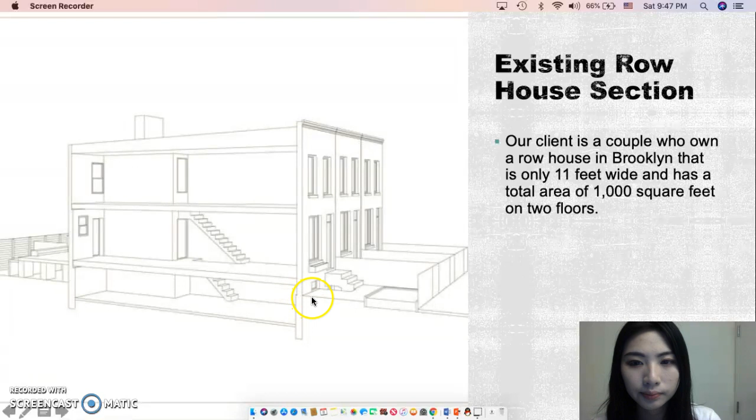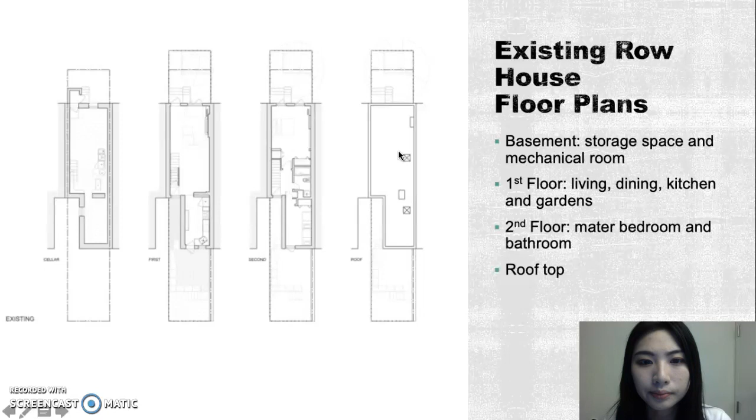Now let's talk about the project scope and objectives. After living in this building for 8 years, they decide to expand the original building to provide more living space for their 2 growing children. They want to stay in their familiar neighborhood, but explore more space for their children. After discussion, they decide to keep the original site and the basic structure for this house, but we will redesign everything for the house.

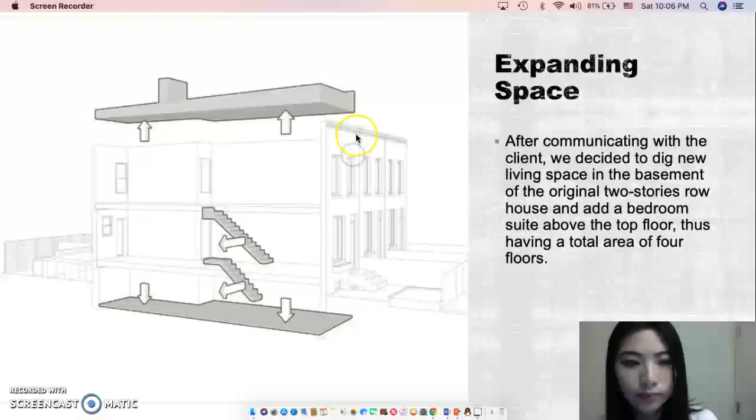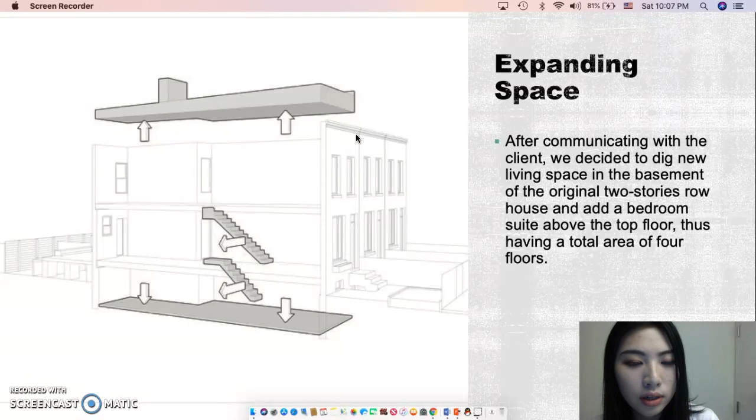Expanding space. To expand the space, our solution is digging the basement deeper and making it a whole floor, so we have more living space at the basement level. Then we remove the original rooftop and have a new rooftop, and we also add 1 more story at the top of the building. The last solution is changing the location of the stair. We move the stair, which was in the middle of the house, to the side of the house, so we can have a larger area for the function programs.

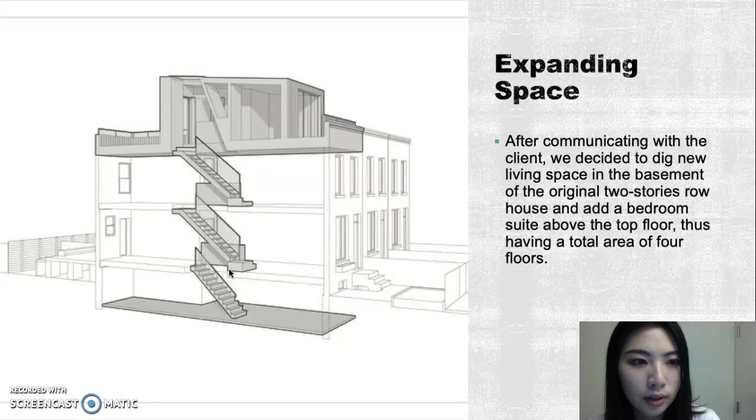Here is what we have after we change it. So we can see the location of the stair has changed, and we have a taller ceiling for the basement, and also at the top of the building we have a partly interior space and an exterior space.

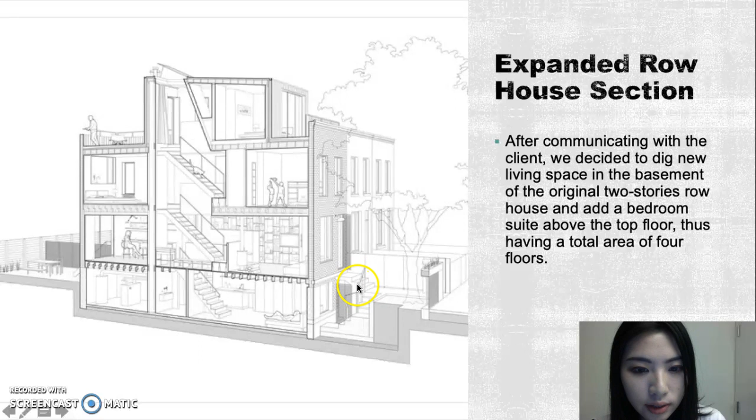Now this is the expanded row house section. On this section we can see our main entrance has changed, so we have two main entrances. One is from the basement, and another is the original one still on the first floor. For the basement, we have the living room, the laundry, and the mechanical space. And for the first floor, the main function is the living area, so we have living, dining, reading, and kitchen.

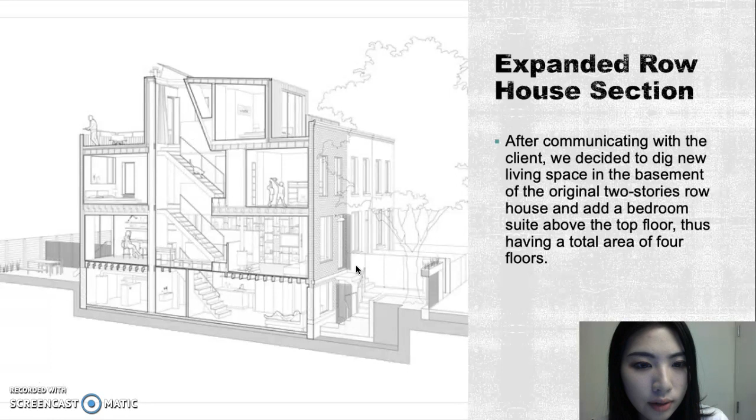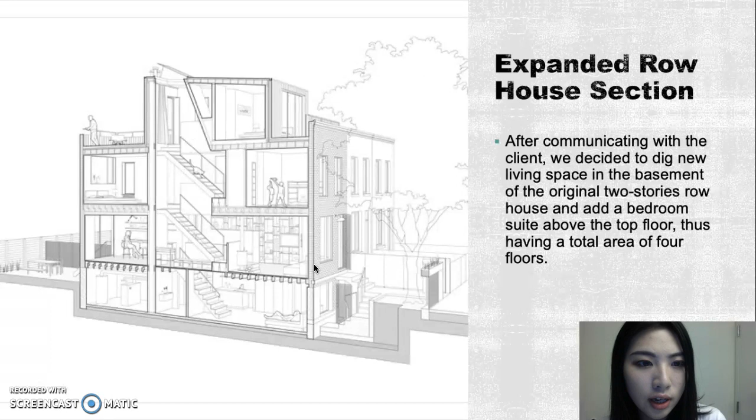Also, we have a front courtyard and backyard. The second floor is designed for the children, so we have two bedrooms for the children, and for the top floor we have the master bedroom. The function of the stair is also for vertical circulation and for passive lighting.

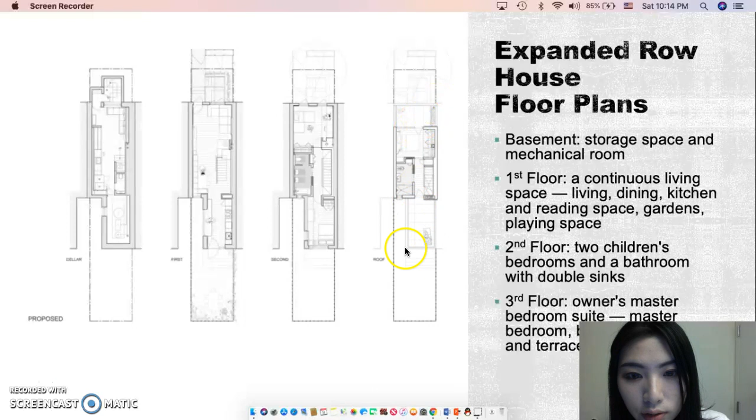So basement, here's the laundry, and here's the main entrance and the living area. This is first floor - we have the continuous living space and dining space, kitchen, and living room.

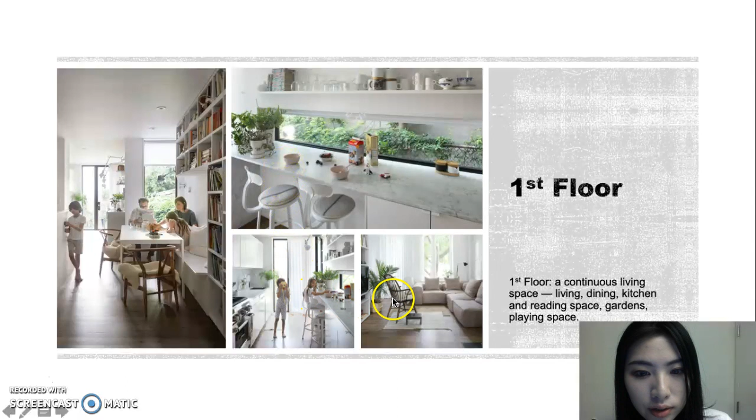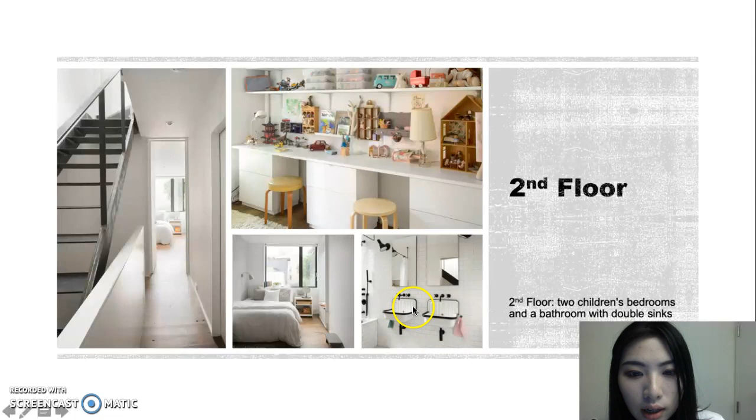Here on the second floor, we have this narrow hallway, but at the two ends of the hallway, we have individual bedrooms for children. We have double sink bathroom, and also the study area in each room. On the third floor, we have the master bedroom suites.

Next, let's introduce our major stakeholders and important partner stakeholders. For our major stakeholders, we have the client and our OA team. Our client is a couple, Benjamin and Karlie. The OA team is Office of Architecture team.

Aniket is our company principal. I am Ke-Xin Luo, the project manager. Ivan is the design director. Edward and Valentin are our senior architects. Stephen is the interior architect.

For our important partner stakeholders, we have general contractor Montest Build, structural engineer Blue Sky Design, code consultant James, Millwork Matthew, and Steel Stair Brooklyn Metal Fab.

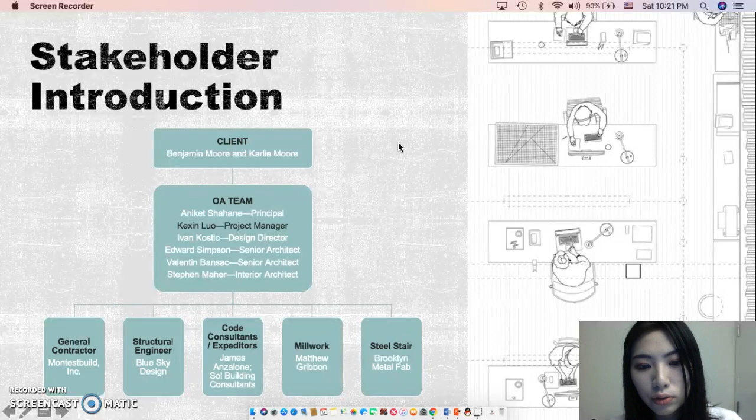Let's discuss the challenges and the risks. Our biggest challenge is that the site is very narrow and deep.